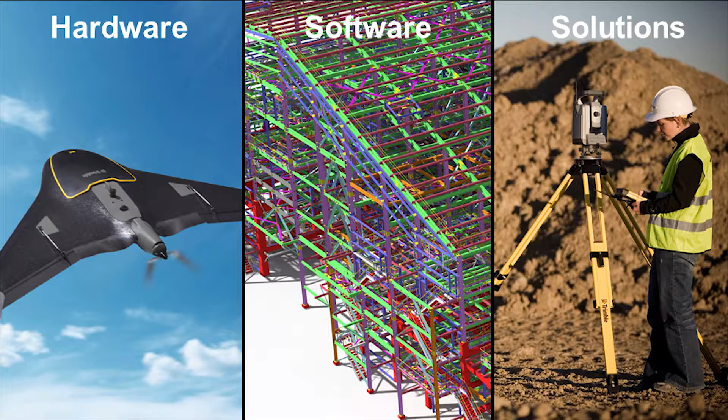A bit about Trimble. Trimble is a global company, about 8,000 employees, 2.5 billion in annual revenue. We develop hardware and software solutions, serving industries such as agriculture, mining, natural resources, heavy civil, geospatial, and of course the building industry, meaning architecture, design, engineering, construction management, and facility management.

At Trimble, we launched our mixed reality program in 2014. Early after this, in early 2015, we actually presented together with Microsoft the first proof of concept for the use of mixed reality with HoloLens for the AEC industry.

Right after this proof of concept, we launched our plans for commercial applications, and we invited some of the most innovative and biggest design engineering firms in the world to join us. We're working today with companies such as AECOM, the largest engineering company in the world, Gensler, the largest architectural design company in the world, Bechtel, L&T, Brookfield from Australia, and some other companies - like we have Cody here from Martin Brothers from California, a smaller company, but a very innovative one.

We are focusing on providing a common solution to our vertical markets with some flavors which match the requirements of those industries. As for now, we're delivering solutions for the AEC industry - architectural solution, engineering and construction management - for the mining industry, and for the facility management industry.

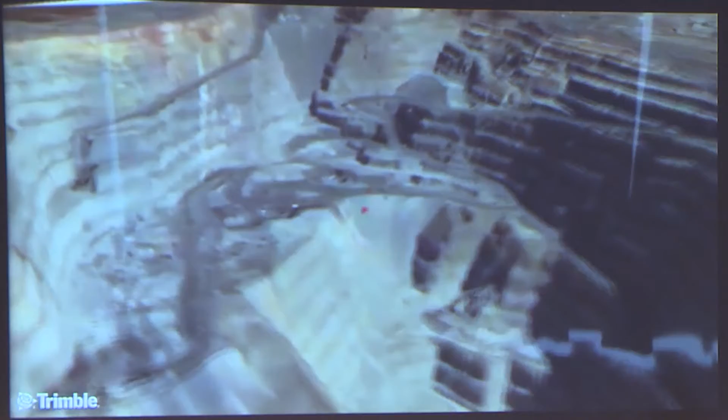This is recorded through HoloLens. I can dive into the mine, I can see the machinery, I can see blast hole design, IoT information about the machines, almost real-time movement of the vehicles. I can replay or play back this information and learn about the work we did, improving the efficiency of the team. It's a great tool to control the information and manage the mine while you are very far from it. So that's the mining solution.

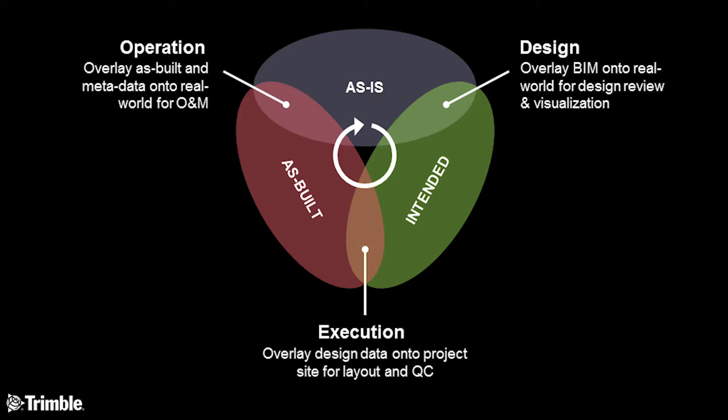Another great example is the building industry. Here we actually provide solutions which cover the full life cycle of the project, from the design stage to the execution, the construction stage, to the operations. I would like to share with you some examples.

Let's start with the architect. This is where typically the projects start. In this example, I would like to show the work we did with Greg Lynn. Greg is what we call today a star architect from California. He was picked to represent the US in the Venice Architectural Biennale.

His project, a Packard plant renovation in Detroit, he joined us and we worked together during the design stage to analyze and review the design, communicate it with other stakeholders, and then present it in Venice to the audience. It was quite an experience to see hundreds of people staying in line just to visualize mixed reality and the combination with architecture.

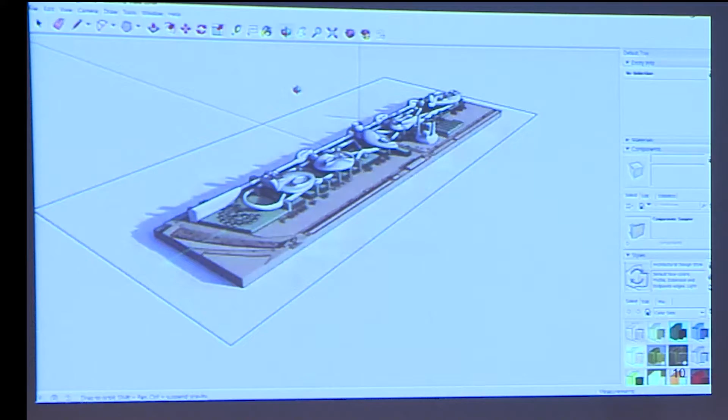Let's see a short demo of what he did. So what you see here is the model in SketchUp. That's where we started, and the design is presented as a 3D model on a 2D screen. But instead of doing it like this, you can actually bring it into life as a physical object and put it on a table.

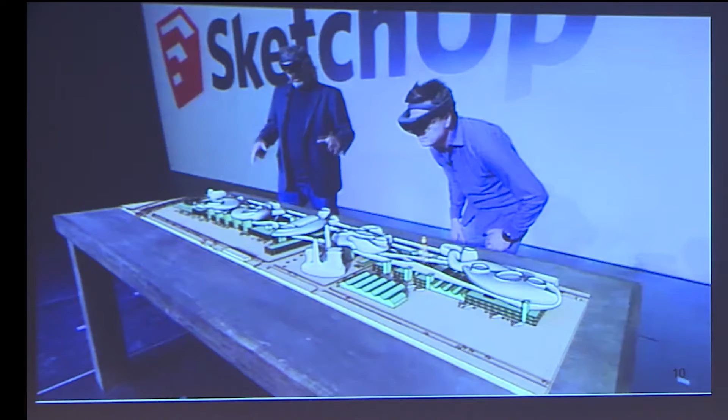Once it is there, you can start walking around it. You can actually analyze it from any angle, like a physical model, but of course much faster to create such an experience. And you can isolate specific sections so you can see them better.

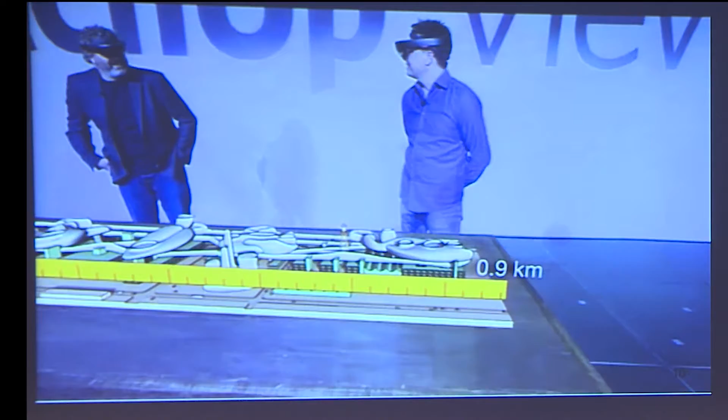Or before that, you can measure information. You can turn on and off layers. You can actually work with the data to better understand what you did, communicate your design decision in confidence, and accelerate the design review. What you see here is a section of the model enlarged.

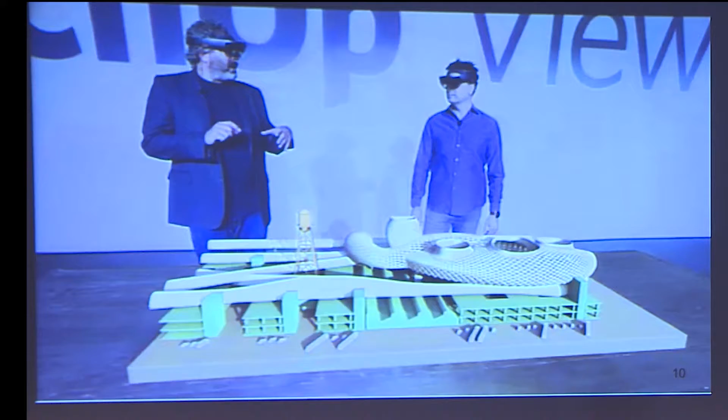You can control the scale, and this is a better way, of course, to visualize what you designed. But you can do more than this. You can actually dive into the model, kind of a virtual reality using mixed reality technology, and figure out how it will look when you are inside your design.

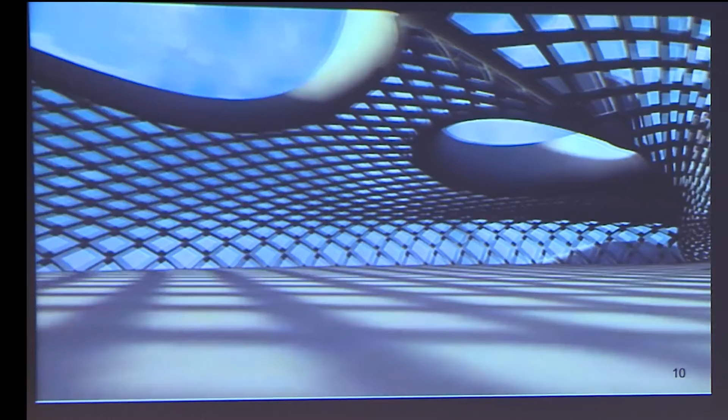So for Craig, and for Gensler, and for other architects we are working with, it's really about making design decisions faster, making them in the moment of inception. It's about shortening the design cycle and taking decisions in confidence.

So this was architecture. Let's take a look at engineering work. For AECOM, which is a global company dealing with projects all around the world, the most interesting part of the pilot for them was to figure out how this technology can be used with remote collaboration, how they can collaborate with teams in Hong Kong, US, UK, and India.

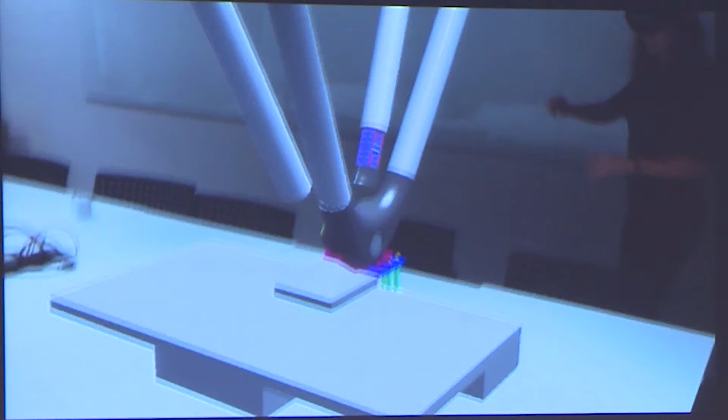What they tested here is a very short movie where you see a group of AECOM engineers actually walking around a holographic model of a structural element from one of the airports they are designing. They can turn on and off layers, change the scale, view it from any angle, and actually better understand design decisions.

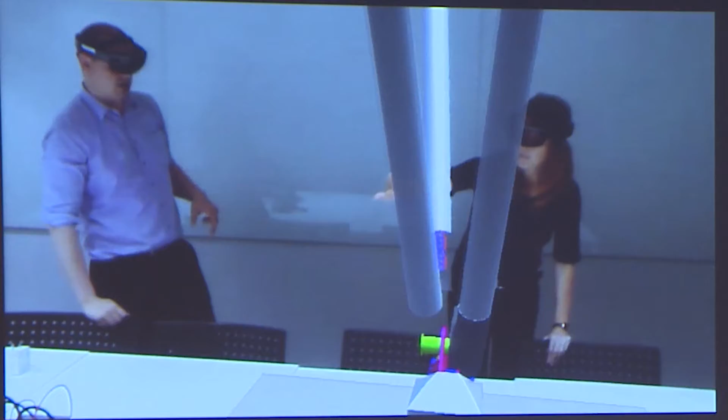And they can do it in a co-located environment, like you see here, multiple users sharing the same content in the same room, or in a remote collaboration style with engineers from all around the world. So for AECOM, it's about accelerating the engineering design process, which you can translate into the financial benefits of accelerating processes in such big projects.

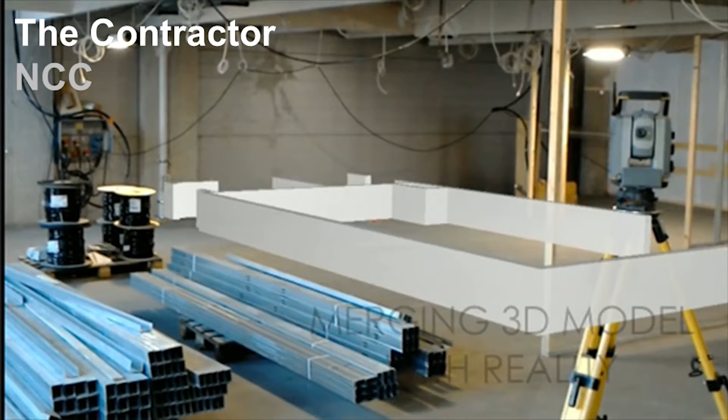The last example is from the contractors, and we have several examples of this. I will show one of them. Again, Martin Brothers experienced this kind of workflow as well. For us, the main benefit here is to allow the construction team on site to understand what they need to build, to control the process, to understand if they are working according to the schedule, and to check the quality. That's what mixed reality will provide them on site.

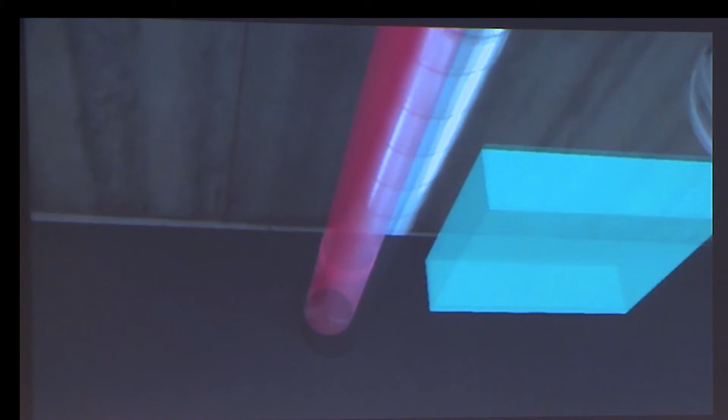What you will see here is a company called NCC from the Nordic region, from Sweden actually. Let's run the movie. First you see that they're visualizing the project that they need to build, merging the physical environment with the digital one, and then comparing the actual work with the design. You can identify discrepancies between the design work and the actual work.

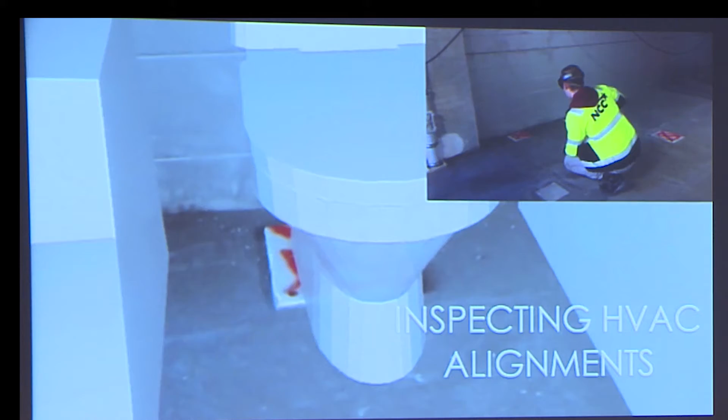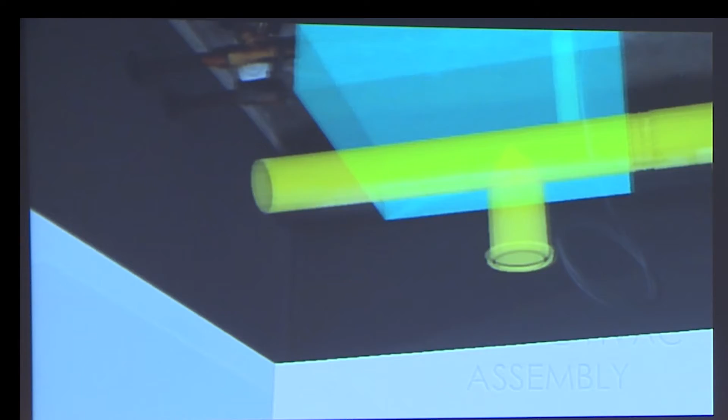Inspecting, figuring out if what was built is actually according to design before they progress to the next phase. And if not, making sure that things are adjusted to avoid this kind of delay later on in the process.

Nice, we have to move on.

And assisting with assembly. That's actually the last slide. So for companies like NCC, it's about more productive ways to do their work. Thank you very much.